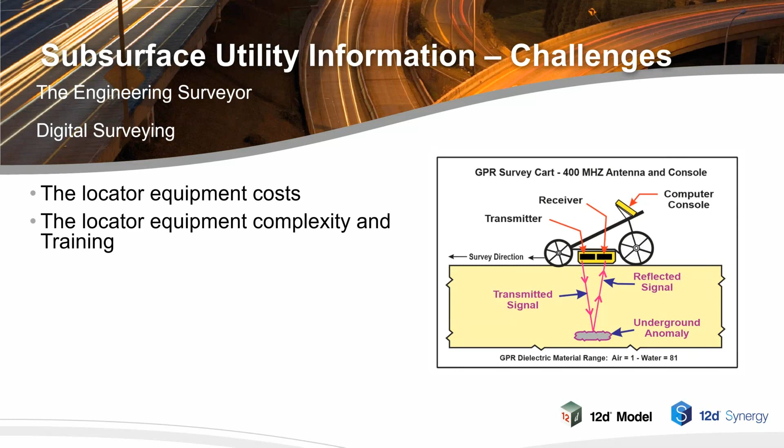So what are the challenges of engineering surveying, and particularly in the subsurface utility information sector? Locator costs are very expensive, as is the subsidiary equipment that is required for surveyors to actually do the surveys. The equipment complexity and training is required. Here's an example of a GPR, or ground penetrating radar. It's not only expensive, but there's difficulties in both training and implementation of the resultant information.

Safety of the use of the equipment. They're out on the road painting everywhere. The survey equipment costs and training is also a very high aspect of this industry.

Some of the things that we're going to look at today are the coding and mapping of SUI information, because as everybody has seen, walking down most streets within any capital city now, there's these paint marks all over the road. We as engineers and surveyors understand what they are, but the general public think there's just been some madness going on the footpath.

The software choice to manage code and apply the attributes and metadata to this information is also very important. And I'm going to have a quick look at how this can be achieved using our product 12D Field. And obviously survey standards, both the AS5488 and the RMS, have to be met to complete these challenges. So the further challenge is the AS5488 Standards. Clients and government authorities require the string and point data to carry sufficient attribute and metadata information.

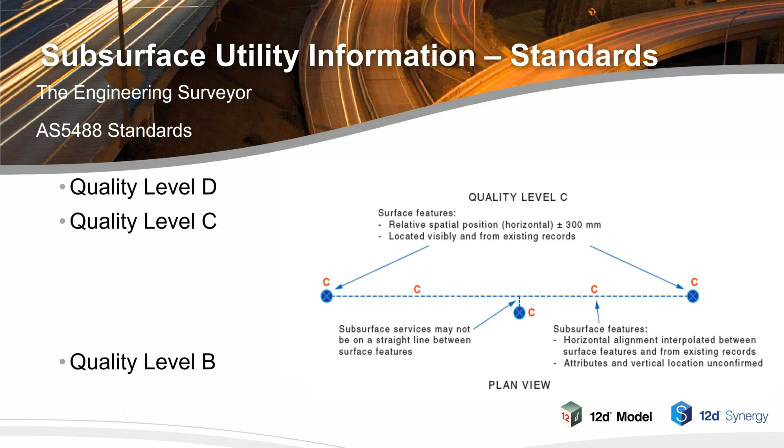The next level in the standard is level C, which requires some spatial positioning information, so a horizontal position of plus or minus 300 millimeters, and to locate visibly and from existing records. So it's basically you have to get out there, look at it and see what's available. They're probably for existing services within the ground. These two cover most history and information that we have from historical data.

Level B is next. Obviously it's been traced here in this diagram. You can see the trace is using either a GPR or radio detection methods for electrically charged services, and they also give a requirement for a relative spatial position horizontally of 300 millimeters and vertically of plus or minus 500 millimeters.

So that's traceability. It must be stressed, though, at this point that even though the tracing has been done, if the tracing is not continuous, the area between the B's on the trace on this diagram here can really only be a level C or D, because unless the pipe is completely exposed, we can't come to quality level A.

Here in this diagram, it shows the quality level A has been using potholing to actually get the positioning of the service underground at the pothole positions. But even still, and this is the inevitable can of worms with underground services, yes, at the pits and at the potholes it's level A, but between those two, is the surveyor confident of the direction of that pipe? Unless you can actually see up the pipe or place a laser to find its directional stability, in other words, it's in a straight line, quality level A and B can be influenced by C and D between the locations of the tracing and the potholing.

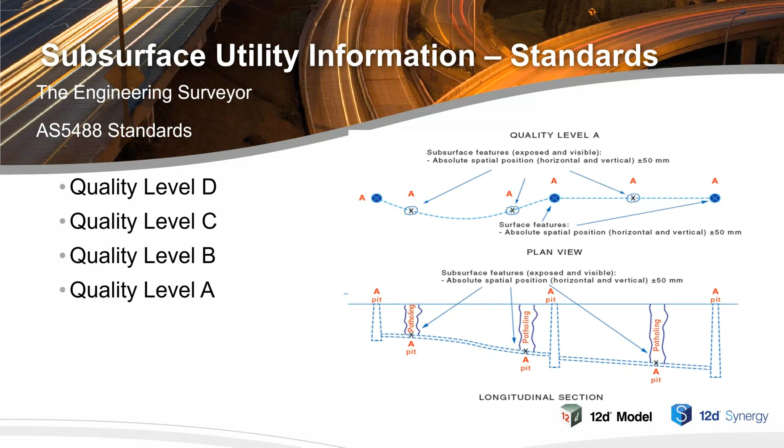So it's an interesting position that surveyors are put in, and there's a lot of responsibility that they require to actually complete a full quality subsurface utility information survey. So what are the goals within 12D and within the engineering surveyors community? Obviously, to standardise the service utility surveys to ensure that the provided data is consistent with the AS5488 delivery framework.

So again, I keep stressing this, the responsibility of the engineering surveyors for subsurface utility information is a very important role indeed. Again, the goals are for reliable information, and they include detailed surveys for design, during construction and as-built. SUI surveyors must be certain that the utilities, whether they're abandoned or active, are actually identified. So the searching and identification of anything that's under the ground is paramount in the first instance.

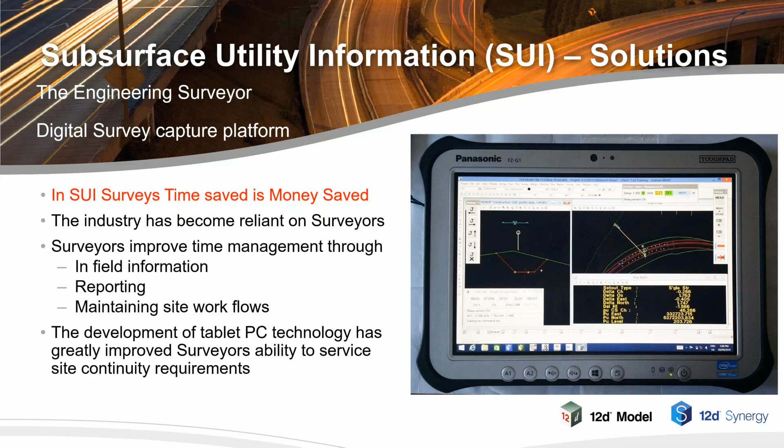And this is an example of a tablet here with 12D Field. For those that are not familiar with 12D Field, this is our construction set out option here, showing plan view, resultant data of where to go to get to the point that you want to set out, and obviously a cross-section view at the same time.

So let's have a look at just a construction life cycle. There's the data collection input, the design creation, the analysis and reporting and documentation, the stakeout and construction, and then the compliance and as-builting. And I just add in here, under every area of the project life cycle in construction, SUI or services takes a role within every detail of that site.

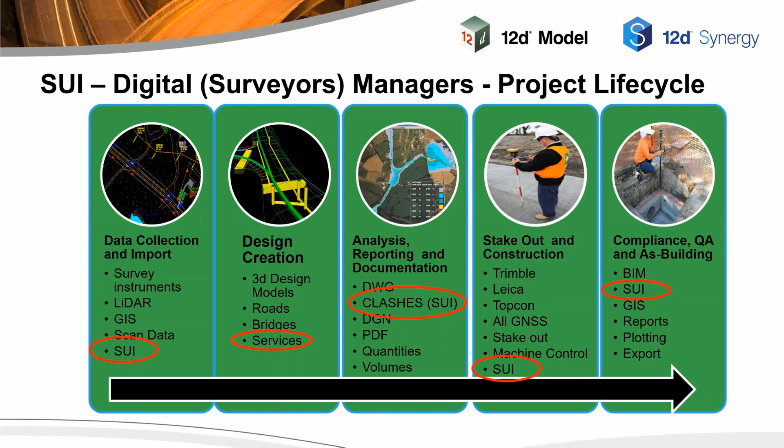So it's a relatively new standard that we're working with, the AS5488, but it is nonetheless a very, very important one in the construction cycle and in the industry as a whole. So let's have a look at Setout and Pickup in version 14 a little bit to see what advantages you can obtain by using our software to manage subsurface utility information or subsurface utility engineering.

The terms SUE and SUI are used respectively. And obviously, dim dark memories of my past is the old field book where you had to write everything down and then get back to the office to plot it. So they're all good changes.

And the solution really is taking your office software into the field, and that's what 12D Field provides for surveyors. You can connect and control total stations, motorized total stations. You can connect and stream GNSS NMEA data, particularly through RTK, live to the tablets.

I'm showing here just as a reminder the Panasonic FZ-G1 tablet, but this works across the board with the ones we saw before, the FC5000 from Topcon, the TSC7 from Trimble, and obviously the Leica CS35 as well. So on the tablets, the design model data can be carried on board so that the surveyor has as much of the design information as he can get.

So for SUI coding, the Engineering Surveyors Group has the purpose to formulate and adopt uniform industry survey codes, particularly for the SUI industry. And that's done in conjunction with the RMS. And for surveyors, SUI, detail, and work-as-executed coding.

The last thing a surveyor wants to do is stand there typing a myriad of information for one particular point, or having major coding for all the different attributes and scenarios that you have with service utility information surveys. So here's just a couple of slides. I'll duck into it live in a minute and have a bit of a run over. It's only going to be a short one today.

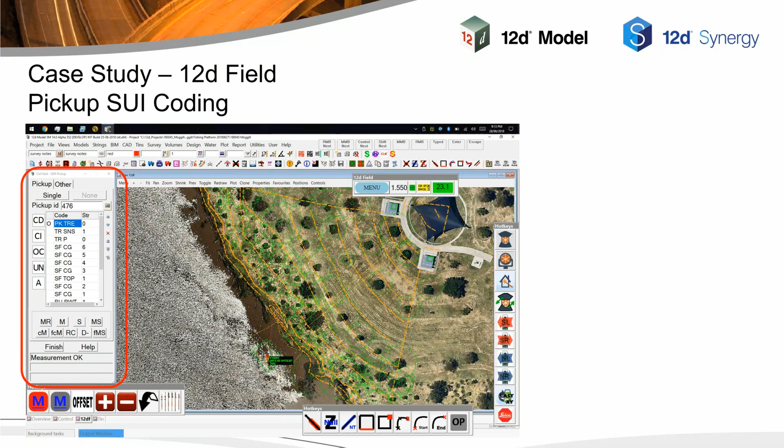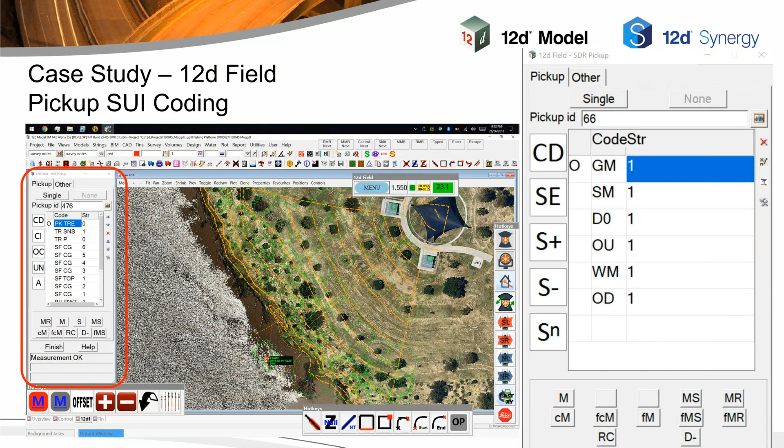That is our pickup code panel for pickup. You can see there you've got your code button for picking your code, and here is a larger version of it on the right hand side. The code button allows you to bring up the codes, and highlighted in blue is the string number, so you can manage the string number as well. This is in the singles, but we also have favourites, which I'll quickly duck into at a later stage.

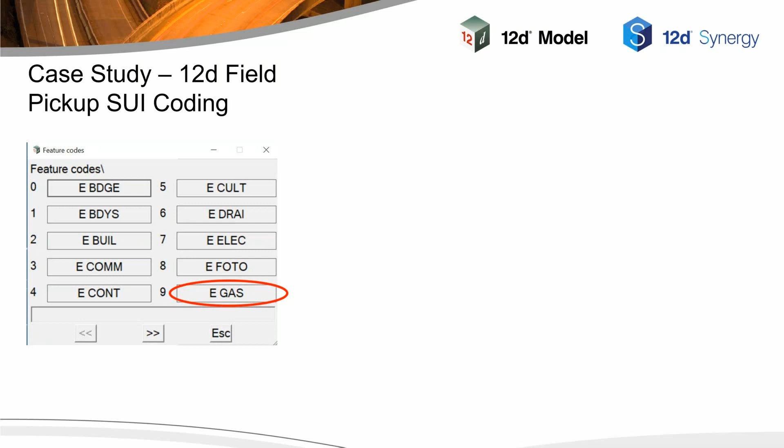So let's have a look at that. Once you press the code, here you've got a code feature GM string 1, and that opens up the panel that brings up the choices for your different codings. So that's just a quick pick of the box, and you can have as many of those as you like. Here we've got a gas option, and underneath the gas there are many different codes required, markers, pipes, all the different features that go with gas.

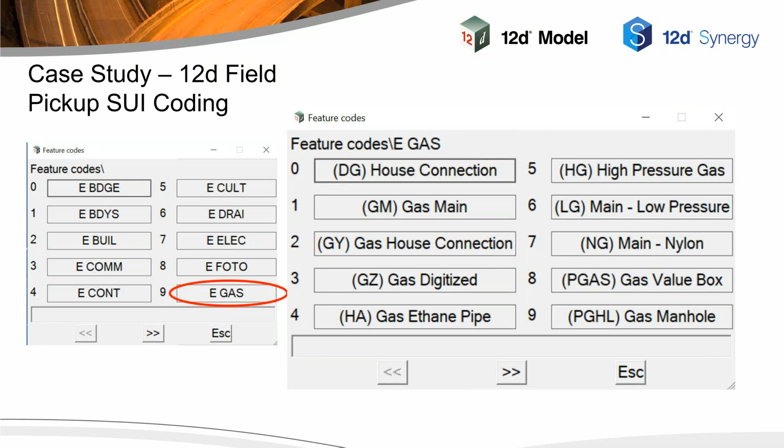I'm just zooming in on one particular one today, and here we've also got the choosing of the gas main. And that allows you to measure that with many various options.

I've had quite a few questions about these buttons down the bottom highlighted by the red boundary. M is measure, MS is measure and store, asking you to input or choose the attribute data. And MR is to measure and record using the previous attribute, so you don't have to keep adding stuff in. You can pick up a gas main and continue on with the same coding if you're aware that it is still the same. The buttons underneath can be turned on or off.

They're configured so that you can actually move, full screen measure and so forth. So they're available as well. But also with 12D Field, these can be all put into hotkeys, and you can minimize that panel down as you're doing your survey. So the M there, the red M is measure and store, and the MR is the blue, so you can measure it.

You can do offsets, you can undo, and you can also do your string increments. So you've got plus and minus there for increasing your string. But these are totally customizable for the surveyors, and they can actually set up their own buttons for many different functions within the 12D Field.

But you've also got the ability with pickup to have your background images in there. You can have live sectioning so that you can actually see your pickup live within a ground surface modeling as you're going on, for clash review and so forth, and many other options. You can actually do individual sections to pick up areas and to look at zones and so forth that you may be required to put in there.

So it's the flexibility of having the entire package of 12D, not that you would use everything within 12D in the field, but the ability to choose that if you need to. And obviously one of the nice features too is a live perspective view so that you can actually see it.

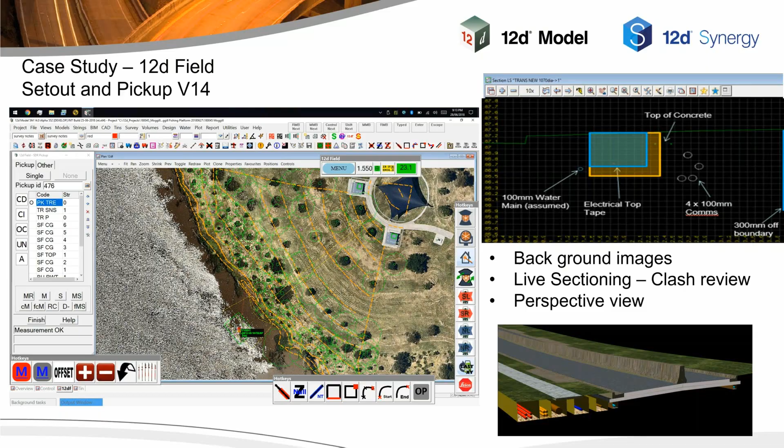So I'm just going to quickly duck out now and pull up this 12D Field job here and have a look at what we've got here. So here in the coding, I've just fired this up. With 12D Field, you've got the ability to obviously choose a code. We can go in here and we'll do that gas main one more time.

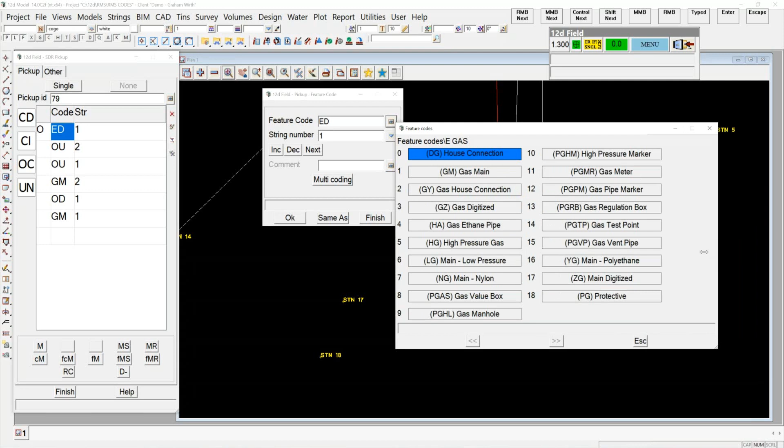So we've got a gas, choose that, and then you've got your ability to have your codes in one panel as a whole. This is customizable so that you can have as many, and this could actually widen out depending on how many rows or columns of codes that you want. And then you can actually just pick those off the screen, and we can go to gas main and we can add in the string for that.

And press OK. Excuse me, I'm just using a simulator here, which is always a bit clunky. And I'll just position this down here. And I'll just minimize that down so that we can actually come back to it. And I can take a measurement, or I can measure and store. And when I measure and store, obviously 12D checks your pole.

The surveyor has the ability to have most things as a choice box. Here is some of the quality level here. So I'll just put this down as a B for this stage. What's the justification? Obvert, center, invert. What was the depth of it? We'll just say, in this case, a meter.

What is the material? And these choice boxes, you can see here, there's lots of different choices. Gas main, I'll just make this a steel one. Its size, you can either have an input of the size if you're unfamiliar with the size and you have the ability to measure it, or you can actually pick off a predefined list. You can also choose the name of the surveyor that you want to use. I'll just use my old friend Scott there, and the date.

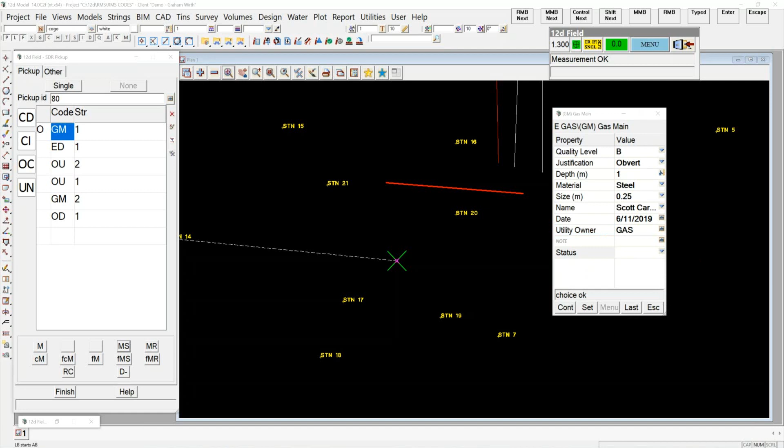We are working towards having that date automated as well, so that's an option that will be coming too. Who is the utility owner? I'll just put gas in there. And what status is it? These are just some of the examples, so it's an as-built.

Now, I'll bring up the attribute manipulator in a second, so I'll just set that and continue, and then we'll just go in and move that instrument, because I'm using the simulator one more time, and we'll put another position over there to survey.

And you can see with 12D Field that it's continuously joining to your last string. So for the surveyor, it's an advantage. He can see where he's coming from and link to it.

When you're using the favorites option within 12D, you can see up here, I've got the favorites or the singles. You can actually call up a set of favorites and run with those as well. I'll just touch on that if I have time there as well.

But in the second measurement for this gas main, all I have to do is press the measure and record down here on the panel, or use a hotkey button, and it fills in the previous attributes that you put in for that string. Very, very intuitive way of doing it to speed up the surveys. And I'll come back to that. Time is money, and money is saved if the surveyor gets in and out of there quickly to do the job.

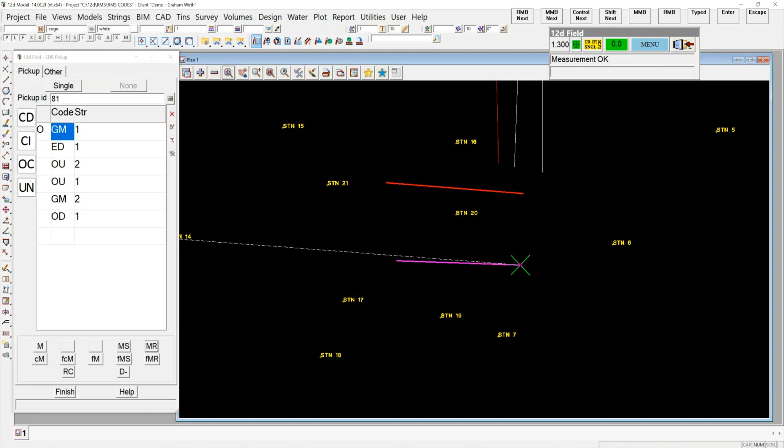And then we can actually go in and have a look at the attributes that are collected from that. So I'll just pick on that, and I'll just drag this over here. So this is the survey. You've got it's a steel pipe for the pipe itself as the string, and we've got the vertex information on here as well, so that we've got that position, what quality level is it, what the obvert, and they're all attributes written in.

Again, with 12D Field pickup, the other advantage is that you've got, for the surveyor, reference back to the quality of his work. He has also in here the station details that this was picked up from, all the measurement details for that, geodetics. Under the 12D Field, you also have the full measurement details here of what instrument was used, who was the surveyor, what date, and this is tied to it at all times, and obviously your details that you stored.

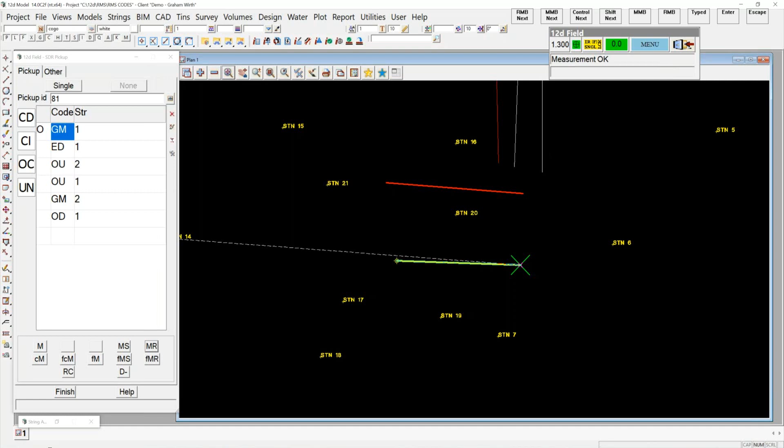Now with that, you don't have any real restrictions on the number of attributes or metadata that you want to put onto your survey, which is a huge advantage for those that want to actually capture a lot of information as they're going forward.

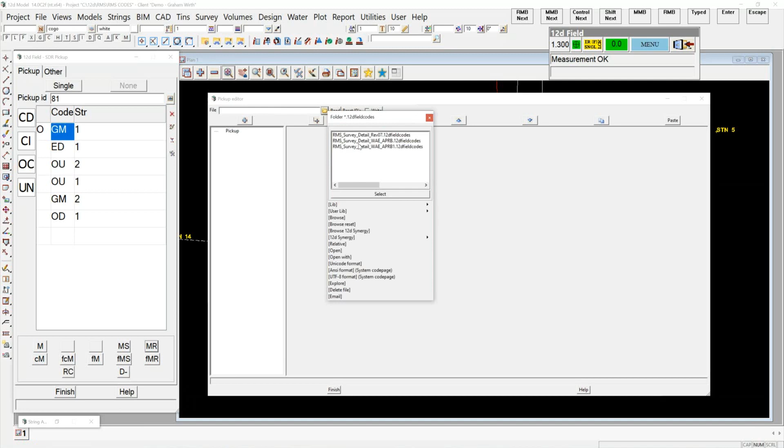And so let's have a look at the survey 12D Field pickup codes itself. That is how we actually come to those choice boxes for the details that we're going to put on the attribute codes.

And the 12D Field pickup codes is a way of using the map file and the pickup code. So the map file defines the line types and the symbol types and the string types and colors and so forth. But the pickup codes editor actually gives you this panel that provides you with the code listings, and we can see how that goes down here with the gas.

So I'll just click on the gas, and you can see here if I drag this out a little bit, it's probably a little hard to see on this 4K screen, but we're getting there. And you can see the details there of the choices that I put in, and it's just a matter of adding in a child underneath that if you want to add more in.

Let's have a look at the quality level. So the choice box is created by actually using a choice in the pickup codes listing. The prompt is obviously the quality level, and that's what we see when we actually fill in the panel on the screen. And then you've got your choices down here, A, B, C, or D. The same for the justification.

It's a choice again. The depth is a real value in this case, but that could be another option as well. That can be a measured option if you wish. The material again is a choice box. The size, in this case, is a choice box with many different sizes placed into it for different size pipes and conduits. But that could also be a real value if you wanted to, or a measured value.

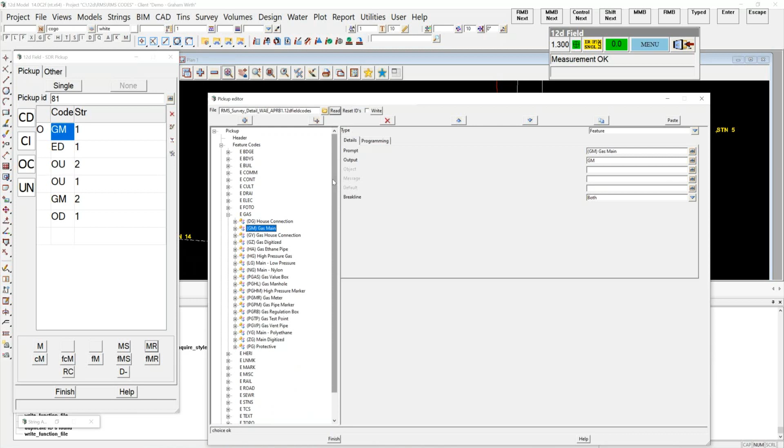Surveyor's name: if you're the owner of a tablet with your own 12D Field, you would obviously only have to have your own one. And as I said, the date is a text, the owner and so forth, and the tablet. And you can also have comments in there to allow for continuous use and comments added on to your attributes as well. So it's a very, very powerful way of capturing, whilst at the same time saving a lot of time.

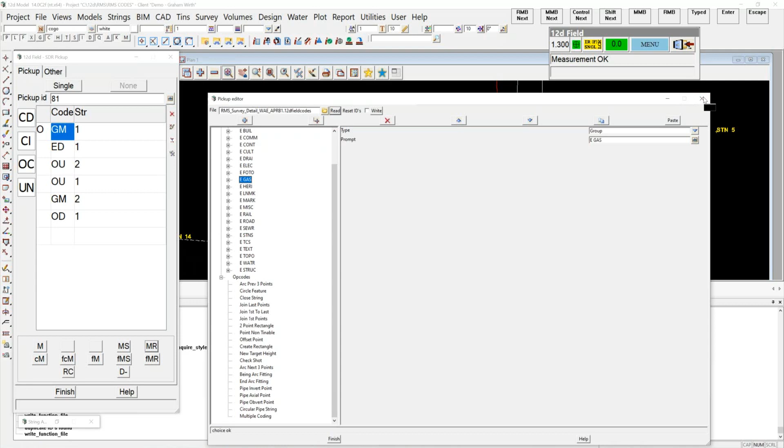The other thing that's important with 12D Field pickup is you also have the ability to do opcodes here, and you can see we've got an opcode button up here, and it calls up these options down here. And here we've got 3-point arcs, circle features, the ability to close a string, and all different types of opcodes. So 12D Field pickup is very comprehensive in its complete nature in supporting the surveyor to actually build his information up.

So I'm just going to duck back to here, and we'll continue on a little bit here. We looked at that slide, so it's obviously not jumped back to the right place.

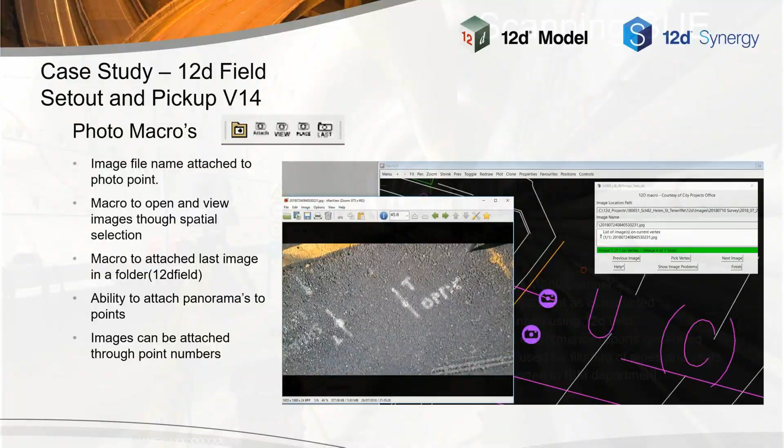So there's other things that go with 12D Field. There's macros available, and to actually capture images. So the surveyor can not only have his graphical interface showing his pickup detail, he can also attach images to those survey points as well, which is another huge advantage for picking up SUI, because I believe you can't have too much information. Surveys can be scanned and allow you to utilize that within 12D as well.

And that's a bit of an overview there of the 12D Field pickup and the SUI. I hope it's been informative. But one other thing: back in an earlier slide, I said the surveyors were under pressure. Surveyors are relied on dramatically within the construction industry, particularly for information from everybody.

12D now has 12D View, which is changing the way we, as surveyors, can share the load, shall we say, with our engineers to make them, one, accountable, and less dependent on the information that the surveyors provide, because 12D View allows an engineer to open up files, open up jobs, different formats that they can bring in, so they can see the survey, they can use that string attributes information to look at who did the survey, what the resultants were for the survey. They can put their reports into their job files and see the reports and so forth.

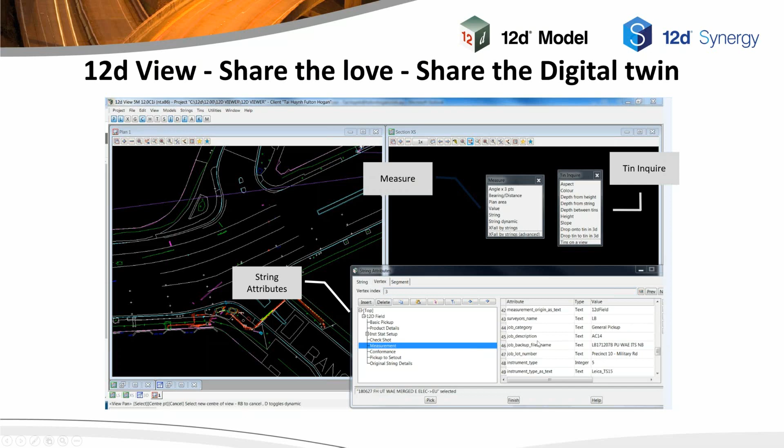Whereas in the past, engineers and superintendents and foremen would be coming to the surveyor and asking many, many different questions, in this case, with 12D View, the surveyor can actually issue the information digitally, and then it puts the responsibility and the power back in the hands of engineers and superintendents to look at the data. So 12D View is an exciting new thing coming up as well.

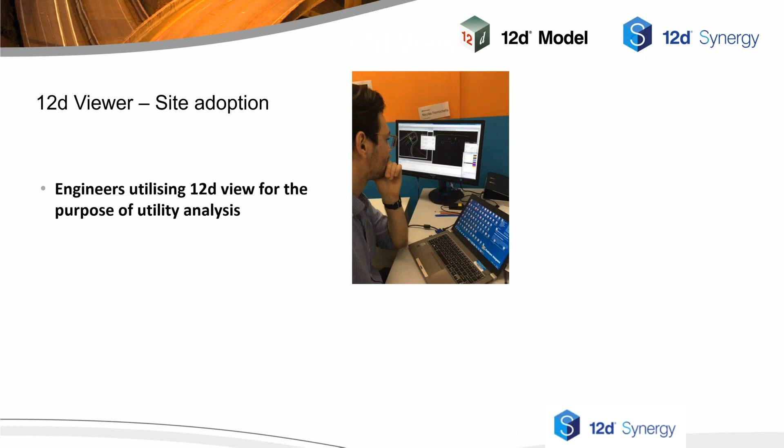And here's just a feedback that was done some time ago, but engineers are utilising 12D for the purpose of utility analysis. So they can actually look at what the surveyors picked up, review it, have a better understanding of what they're looking at, rather than the surveyor taking them out by the hand and pointing at the paint mark on the ground. They can actually see it themselves. So they can see also the information that is available.

So again, time, cost, and quality benefits are being seen through the implementation of the viewer. And engineers are actually enjoying this empowerment and ownership and accountability of the information that surveyors provide them, rather than just a simple PDF report and let's go and have a look at the site situation with the surveyor. It's also freeing up a lot of time for surveyors.

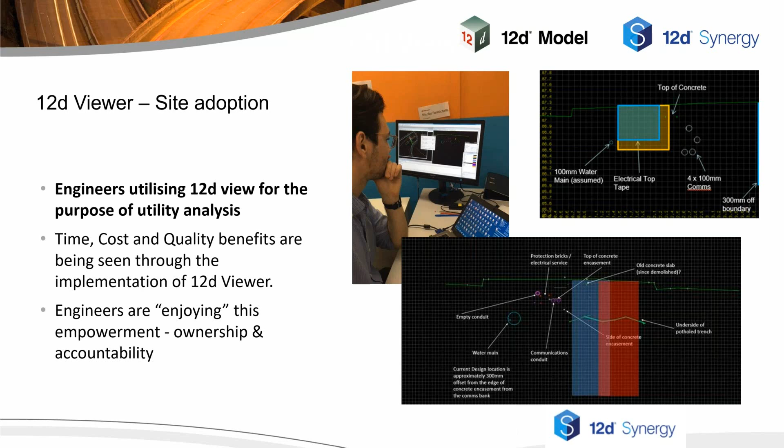So that's about my presentation for today. I thank you for your attention, and I hope I've been of some value to you.